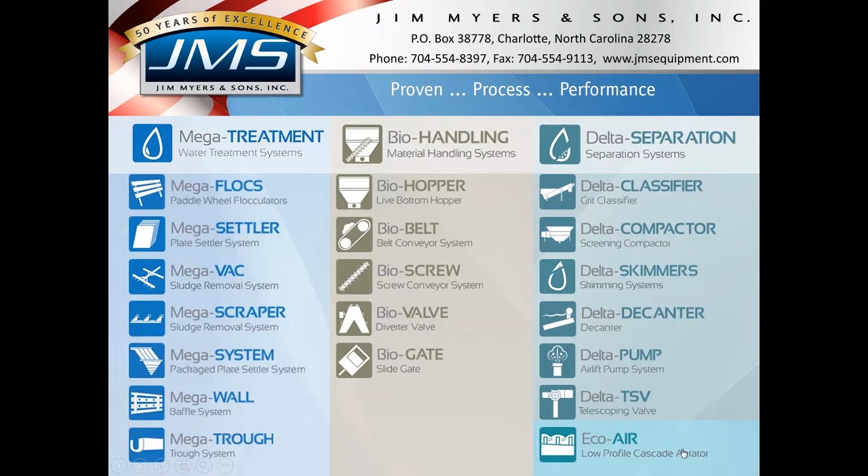Today we'll focus on the Mega Treatment family and specifically Mega-SETTLERs, which is our plate settler system. So without further ado, I'll jump right into this. Maybe 15 minutes or so of general information about our plate settlers. It starts off with some fundamentals.

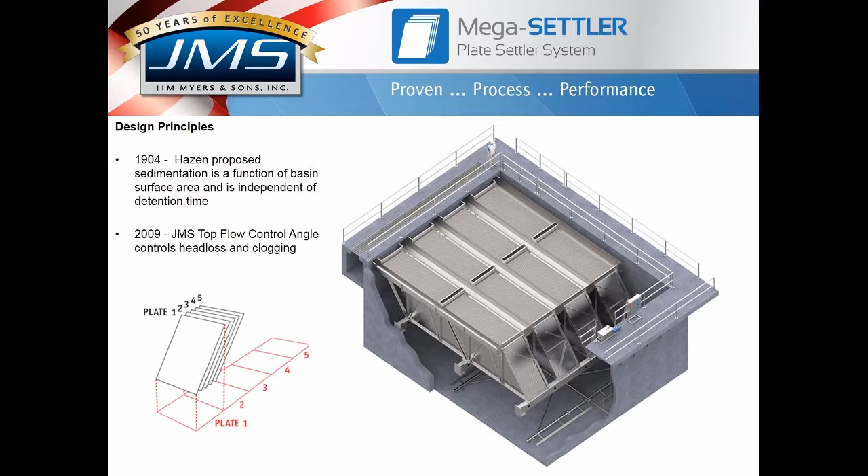Application rates and efficiencies. This chart just kind of shows you some different ranges that we see in application rates and efficiencies. We've done jobs at 0.2 application rate up to 0.6, but if I look at probably 500 of the most recent jobs we've done over the last several years, or worked on at least, it looks like the industry average is starting to come to fruition to be about 0.3 at 80% efficiency. That typically produces less than 1 NTU in the effluent, and it gives the operators some safety factor as far as how fast they're operating the system.

Now that's kind of industry standard. It's more the average, but again, we've done all different rates, and we can certainly help with determining what is the right rate for your application. On some large projects, we'll send out our pilot unit sized for 110 gallons per minute, and that will be used to get a closer idea of what is the actual application rate that we need for the water. If pilots aren't needed, we kind of default to 0.3 at 80 or 90% efficiency.

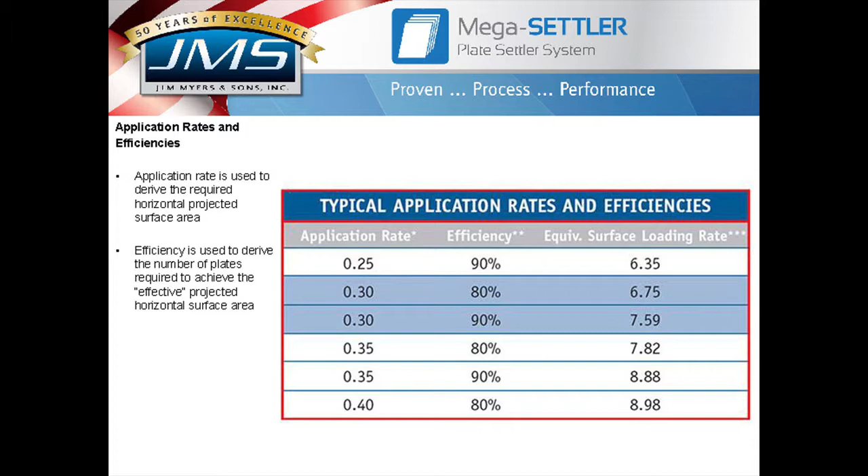This is a design program that we've been writing for the last decade. So really what we've tried to do here is for most any question we receive, we'd like to have an answer pretty much instantly with this design program. It's a Visual Basic design program. It allows us to very quickly provide application runs for a lot of different scenarios. So just taking you through the chart here: basically, if you hit the JMS button, that's the run button.

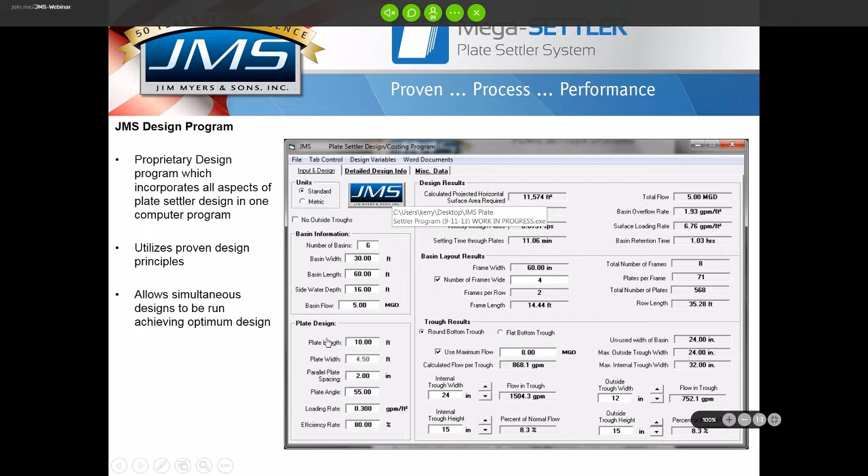Coming down through here where you input your data, we have number of basins, the basin width, the basin length, side water depth, and the basin flow. Very fundamental information that we need to start the design. From there, we input plate geometries: the length, the width, the spacing, plate angle, loading rate, and efficiency. We can change all of these; they're all variables. But once you put that in and hit run, it's going to calculate how much projected horizontal surface area you need to achieve that flow at a given application rate. That's what you're seeing up here. It calculated the surface area required.

Then it's going to derive how many plates you need to achieve that surface area. And at all times, it's looking at velocities through key areas within the basin. So you have velocities through the plates, the settling time up through the plates. We also put in basin overflow rate, the surface loading rate, which is just of the plate settlers themselves, basin retention time, and a lot of these are items that we keep an eye on. We have rules of thumb to provide the best effluent quality possible. Also in the background, it's looking at Ten States Standards as far as other velocities within the basin, length to width ratios, items like that.

In the center of the program, it's going to basically say, we know how much surface area we need, we know how many plates we need, and it's going to do a little bit of rounding and fill the basin with plates. So 4 plate packs across the basin, 2 long. Each one of those frame assemblies is approximately 14.5 feet long, and you'll need a total of 8 frames within that basin. Each one of those frames would have 71 plates for a total of 568 plates.

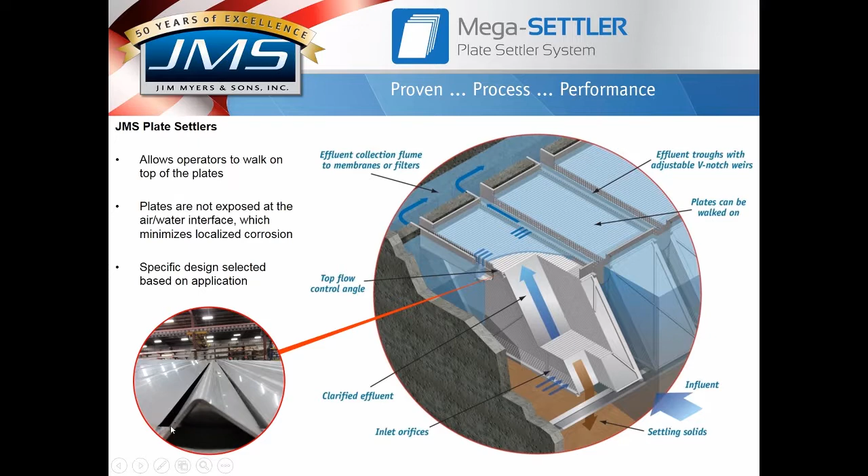Most of the time when we're talking to engineers, you guys will look at doing life cycle cost analysis. You'll look at doing budget numbers based on footprints and area of a plant, and all of the life cycle cost analysis that we've been involved in over the last probably 5-10 years looks like plate settlers do very, very well when comparing to other technologies out in the market today. So again, just a little bit of info about the top flow control angle and specifically the JMS plate settlers.

The next slide gets a little deeper into CFD, or computational fluid dynamics. So 10 years ago we worked with an independent PhD. We had this idea, the top flow control angle. We thought that it would really advance the technology. It was an economical solution, all of that. So we went to an outside company, ran several hundred different CFD analyses, and came up with what we found to be the optimum design as far as the flow control gap.

And some of the things that went into that were selecting the right amount of head loss, because theoretically you can keep adding additional head loss and get a little bit better effluent or a little bit better laminar flow up through the plates. What we wanted to do is achieve laminar flow up the entire surface area of the plate, but we wanted to do that by inducing the smallest amount of head loss through that flow control gap.

And another thing we wanted to do with the flow control gap is solve some of the issues that we've seen with competitors. We wanted to do whatever we could to solve any clogging issues that plate settlers have seen in the past. And what we found is that the flow control gap spikes the velocity to a high enough velocity at that point that it actually flushes that gap at all times.

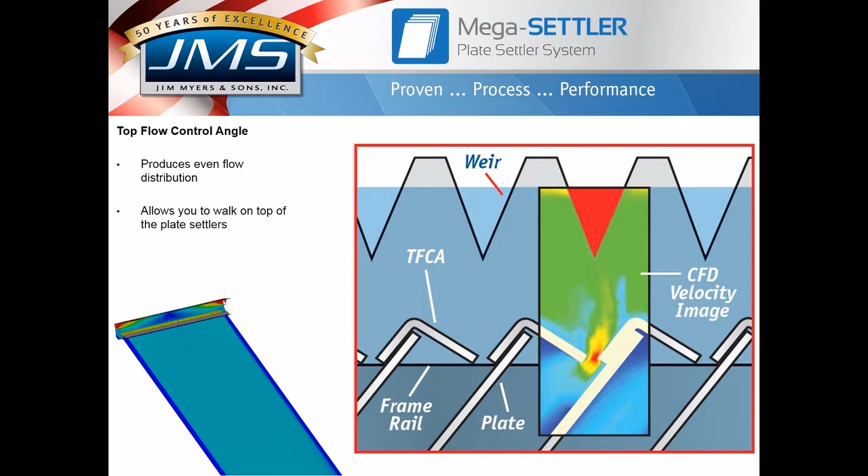So that's very, very critical, and a lot of work went into that as far as proving that with the CFD, proving it in the field. We actually did a big job in Tacoma where we physically measured flow at a 75 MGD plant at different areas throughout the troughs, throughout the plate packs themselves. So that was kind of an interesting exercise out there.

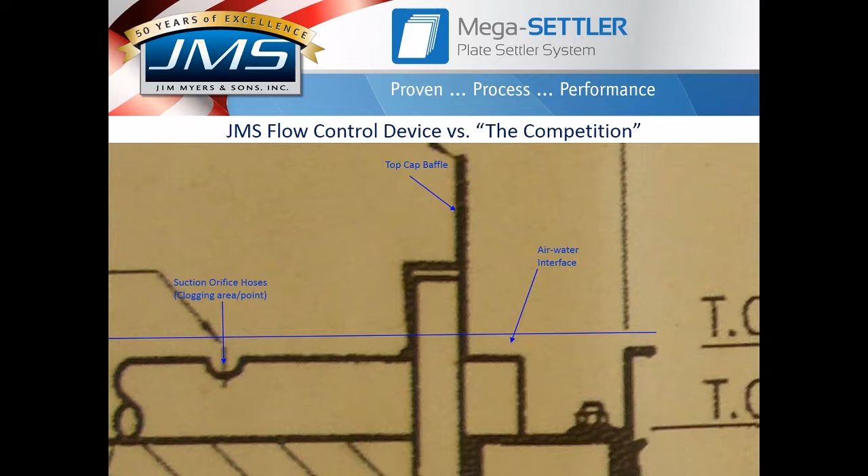And some of the main differences are, I mentioned we have a flow control gap. This particular competitor uses orifice holes, provides a head loss, provides good effluent quality, but what we're seeing and hearing from the market is potential clogging issues with heavy solids, leaves, and algae. And I'll just go through some of these a little quicker.

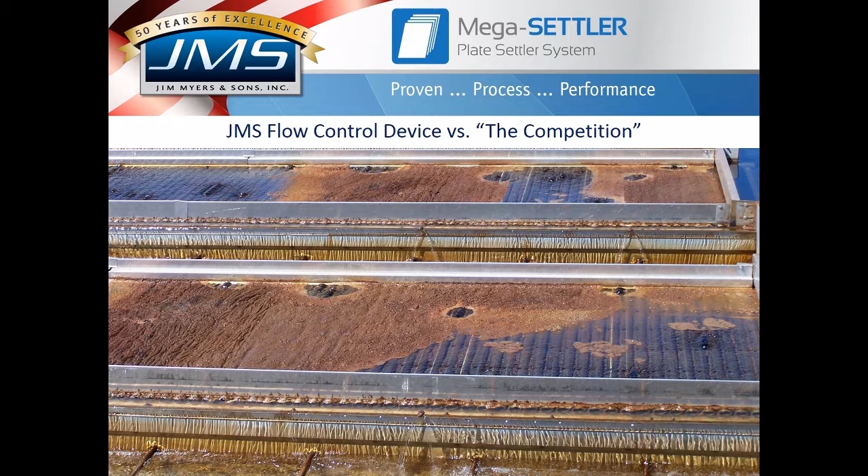We have a V-notch weir. That V-notch weir is always pulling from the surface of the water, so you're never going to end up having a huge buildup of solids. So this plant's been running 6 months or so, so as the solids build up, it has a tendency to back up and then imbalance the actual flow coming up through the plate settlers.

The next one, this is a job down in Oklahoma, and actually the plant has called me, and we're working with them and looking at ways to reduce algae issues, and again, this is a competitor's design. And what we're seeing is the competitor's design has about an inch or two of water above their top tube, and it's becoming like a perfect incubator for algae. So we're doing some water temperature tests. The temperature of the water in that stainless steel area above the tubes is typically a couple degrees warmer than the rest of the basin.

And again, the nature of the top tube and the orifice holes have a tendency to keep solids, or in this case, keep algae within that zone above the plates longer. And again, it becomes kind of an incubator. It's a little warmer, and now you're keeping those particles in there longer, and then before you know it, you can have an algae bloom.

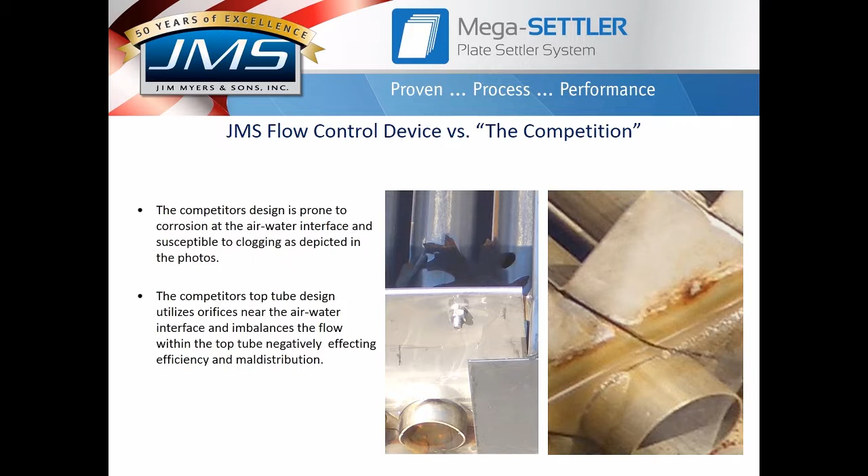We haven't seen this level of algae bloom with our plate settlers. Again, it's got the flow control gap, and you are pulling from the surface, so it doesn't give time for the algae to bloom. And typically, we have about 5.5 inches of water above the plates themselves. So just, again, some differences between us and the competition. This just shows you can have some leaf issues or anything on top going towards the orifice hole.

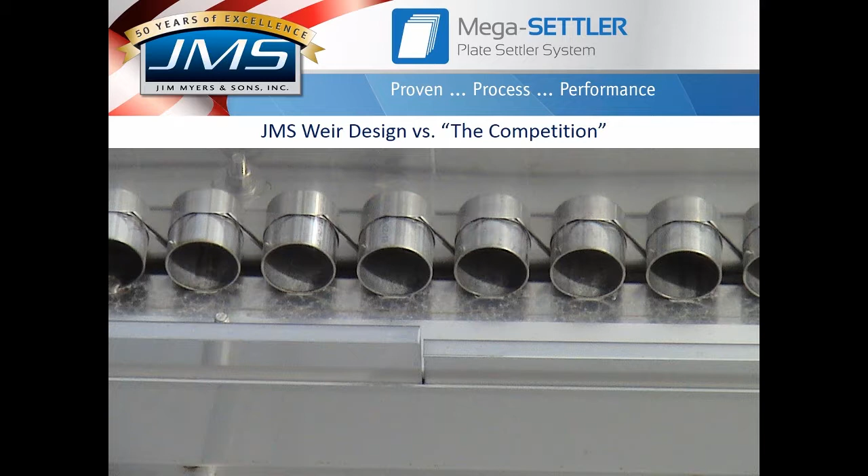And again, it's a reason why we bolt on our V-notch weirs, really like you would see in any effluent trough around the country. It follows the 10-state standards as far as the bolt spacing and things like that. Just another image of the competitor's sheet metal clip. So you can see it's very economical, but at the end of the day, for a long-term solution for the plant, the feedback we're getting is that they have to re-level the weirs quite a bit, and it's very difficult for the plant to do that, especially on large plants. So again, that's the reason we do V-notch weirs at that location that bolt on and are fully secured.

The next couple slides here I'll kind of blow through. These are some testimonials of JMS plate settlers. So Bloomington, Indiana, this was a job with Black & Veatch. About 15 years ago, I worked on this job when I was at Brentwood Industries as the tube settler product manager. And we put in tube settlers in both of these clarification basins.

So this zone here are all tube settlers. Each one of these basins is sized for 12 mgd. So fast forward to about 3 years ago, got a call from Black & Veatch, and they were out of capacity at that plant, but they were also out of room. They couldn't fit the additional basins. They couldn't put a third identical basin right next to that.

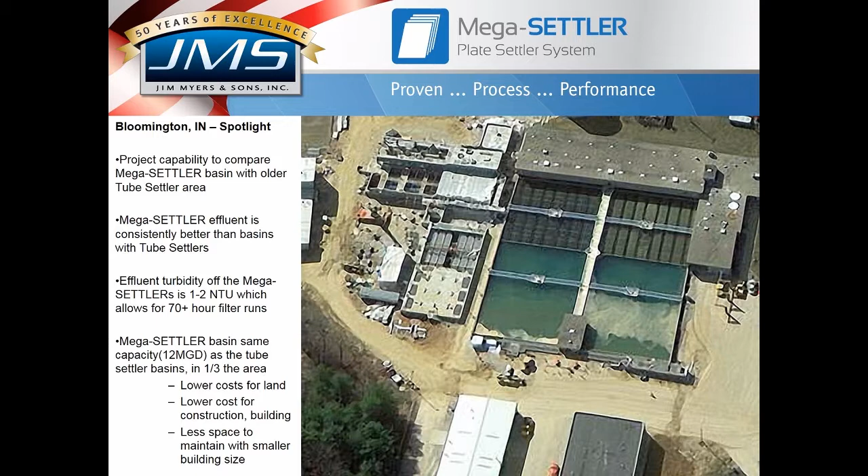We call and talk to the plant operator pretty frequently. And the feedback that I've got from them is they can wash down the plate settler basin in literally a fraction of the time of the tube settlers. They don't have to worry about breaking any of the PVC tubes and things like that. And in general, it is producing a higher quality effluent, regardless of incoming turbidity. So just I think a good testimony. And all of these are available in our references, and you guys can call any of them. I'm just going to go through a couple more to give you a little bit of feedback.

Danville, Kentucky. This is a plant expansion. They added 4 basins, each one designed at 4 mgd. I was just out there about 2 months ago. Took a picture of the SCADA screen to see what kind of effluent quality they were getting out of the plate settlers. On this particular day, they were getting 0.33 NTUs off of these plate settlers. It's a very, very good number.

They weren't at full capacity. But again, just showing what plate settlers can do for you, and really what it did for that plant was they had full filter runs, and from a maintenance standpoint and the filter runtime and the media loss, with having that full runtime, they were ecstatic that they were getting that kind of quality water to their filters.

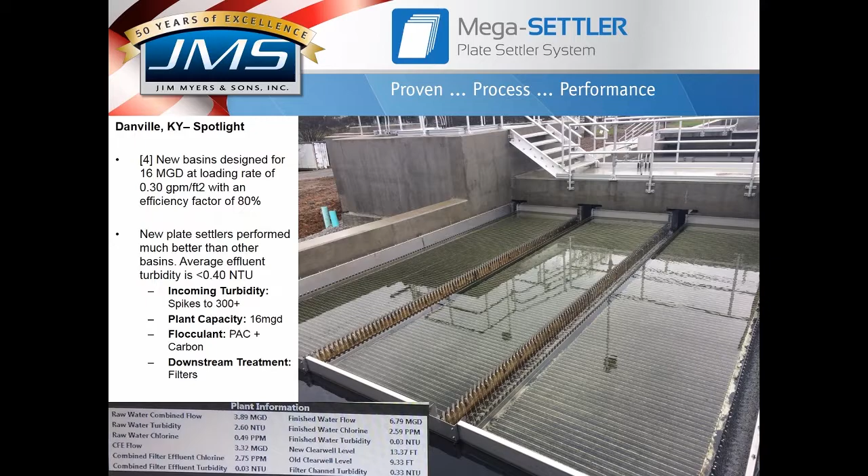Let's bounce through a couple of these. This is an interesting one here. Oak Creek, Wisconsin. We have plate settlers in a new part of this plant, a brand new basin. It's right next to an older basin that had the older style plate settlers from, I believe it was Siemens Zimpro, before they had head loss devices and things like that. And then also they have a basin that is just effluent troughs. So a really neat opportunity here.

This plant is certainly fine-tuned. It's a really high-quality plant. They've won a ton of awards. They actually sell their water as bottled water that literally says Oak Creek Water Treatment Plant, and you can buy it at local mini-marts around the area. So it's certainly an impressive plant, but they are achieving high-quality effluent out of Lake Michigan.

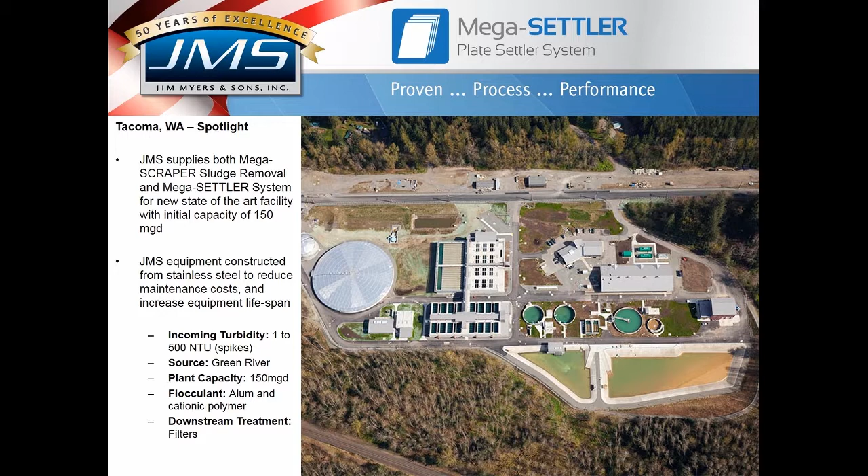And one thing they also did is they have plate settlers in their backwash basins because they wanted to clean up and recycle as much water as they could and thicken the solids. So just an interesting job. It's been out there operating very well for the past 5 years or so.

Quick recap, and again, I kind of went through it quick, but we're kind of running up on our time schedule here, and I want to be sensitive to everyone's time.

But quick recap here. So it reduces the footprint by 50 to 90%. So a lot less land, smaller buildings, less maintenance, just overall less cost. And again, I think a lot of those reasons is why we're seeing plate settlers being so popular nowadays. I mean, we're certainly not getting any more land. If these are in a cold weather climate, you can get the basins to a size that you can actually afford to put a building over top of them.

Less maintenance, so really the only maintenance you have is you wash these down periodically. And typically that could be 2 to 4 times a year, depending on the influent quality and your chemical feed program. But as far as the plate settlers themselves, what is the life of the plate settlers? We projected at 30 plus years easily, but really if you add plate settlers to that plant, they're going to be there as long as that plant's operating.

Certain things depend there. Maybe if you switch from alum to ferric, but you didn't provide all 316 stainless steel, you have to look at things like that. But typically what we do is we provide anything at or within 4 inches of the air-water interface to be 316 stainless steel. And that's just because that's the most susceptible zone for any level of corrosion.

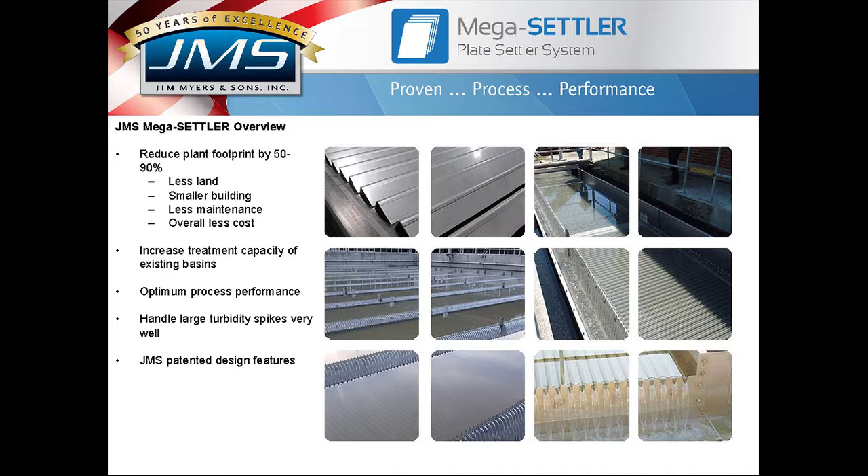So that's something we keep an eye on all the time, just raw materials that are available, what are their costs, because it's one thing that, hey, you can get the material, it will work great, but if it costs too much and it's not within budget, it doesn't really matter. So again, we can do them. We haven't provided any yet, but that's because a lot of those jobs we worked on just haven't moved forward. So I would see in the future that's going to be a pretty big market for us.

It's for our internal use. We are contemplating doing a more simplified version that would almost be an app that we could distribute. But right now, that program is tied to high-level costing and bill of materials. So if we do give it out, it's going to be a more simplified version that's just regarding the design aspects that you guys would need. So that's in the works. But as of right now, that's an internal program available to us. But one thing nice about it is if you guys need us to run as many designs as you need, we can do it so quickly, so it's really not a problem for us to do that.

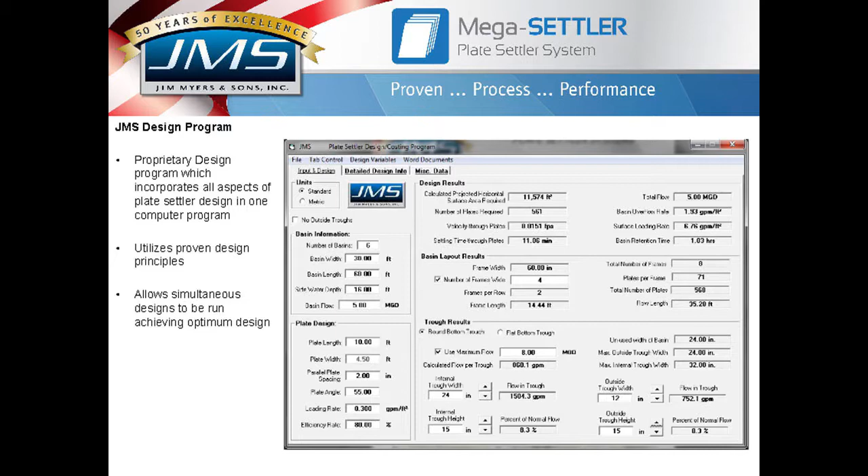I didn't cover it in my presentation, but we're seeing plate settlers in wastewater treatment becoming much more common. In Europe, there are tons of plate settlers in primary and secondary wastewater treatment plants. They're making their way over to the States, and what we're seeing is the use on several jobs up in Canada. And actually, I think we have AECOM on the line who's doing some work out in Victoria, British Columbia, and they're utilizing plate settlers in a primary wastewater plant.

The reason they're doing that is the footprint and the available space that they have is very, very limited. The land is extremely expensive out there. I think the entire system is going to be in a building for odor control. The building kind of looks like a museum, it's actually a pretty awesome building. But keep in mind, plate settlers are certainly being used in wastewater plants.

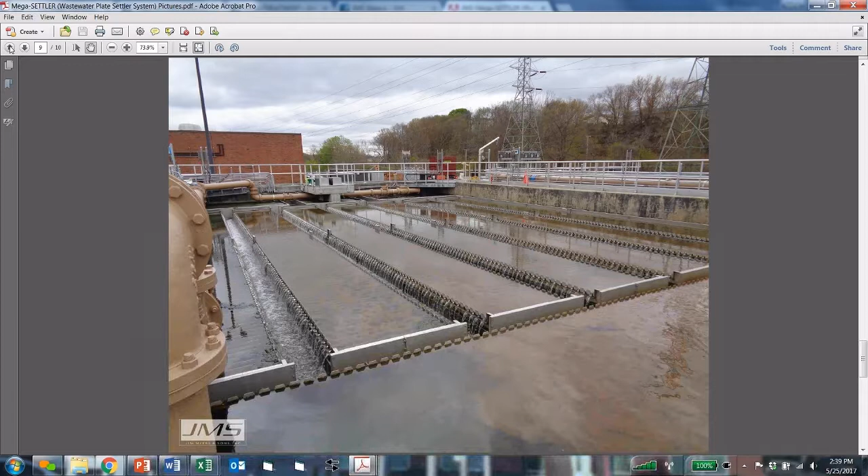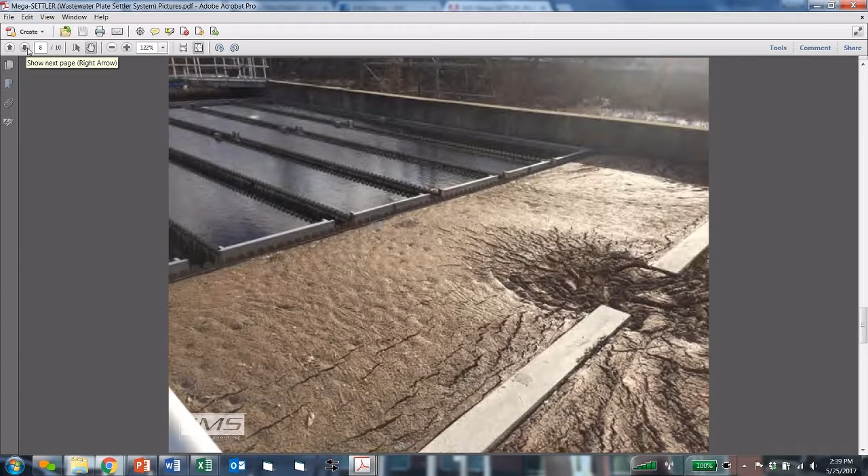This is a picture of our installation in Woonsocket, Rhode Island, and there's 3 basins like this. It's a 60 MGD wastewater treatment plant, and these are in the secondary clarification, so it's actually treating the water and the mixed liquor right after their aeration basins. Typically, the mixed liquor is about 1,500 milligrams per liter coming into the plate settlers. And this shows you, before they had their weir set properly in the front of the quiescent zone here, how many solids were actually coming into these plate settlers. And they handled it very well.

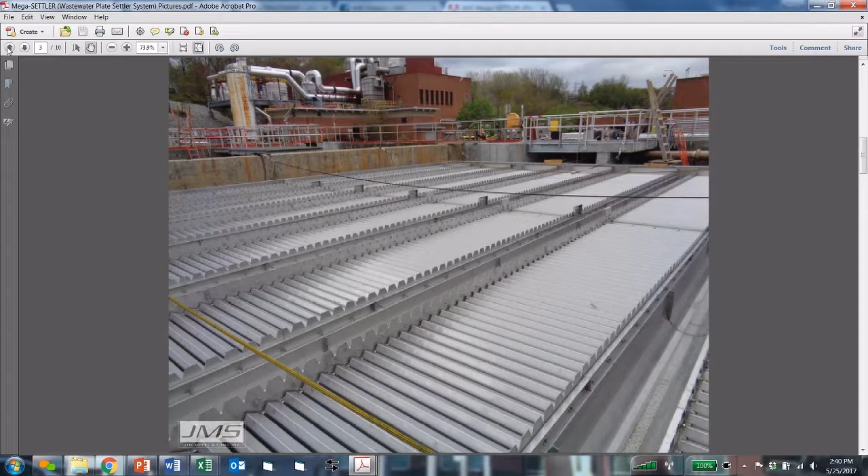These plate settlers had a 4-inch plate spacing, so that's typically what you do when you have a heavy solids loading. Just going through a couple more images so you can see the installation. They had chain and flight sludge removal underneath. Effluent collection troughs, you can see there. Here you can get a sense for the V-notch weirs and the 4-inch plate spacing. Typically in a drinking water plant, the spacing is about 2 inches.

So I just wanted to take a few minutes and expose you guys to plate settlers in wastewater applications, because again, we're seeing more and more of those. There are two major jobs right now, actually both in British Columbia, that are going to be bidding in the next few weeks to few months that are going to be utilizing plate settlers in a wastewater application. And let's see, I think I had a couple other items maybe that I wanted to show.